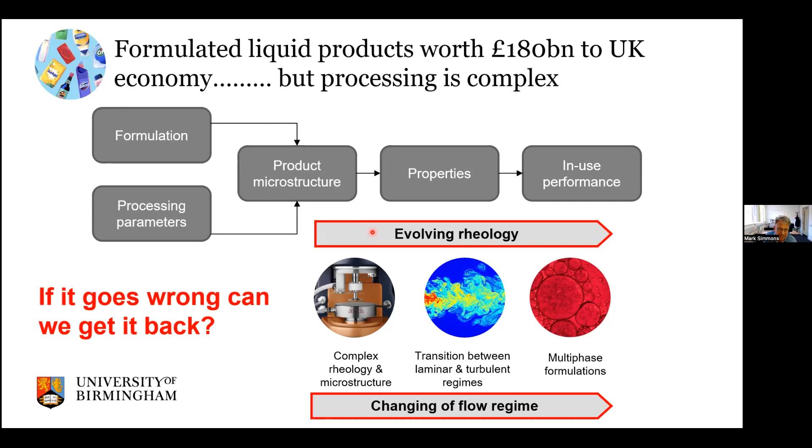So they're hard to process, and we need to find ways as engineers of being able to do that, particularly as we change formulation, changing to new ingredients, perhaps changing to greener ingredients that might inherently be more variable in their properties. How can we make sure that we maintain that product quality? And of course, very importantly, if it goes wrong, can we get it back? Because if we mix badly and we get the wrong microstructure and there's nothing we can do about it, we've got a big sustainability issue with lots of waste.

So I hope I'm not going to flit around too much today, but I thought it would be useful to give a bit of an impression of three current areas of work that we're doing in our labs in Birmingham, together with our partners, including Joelle actually, and David Fletcher at the University of Sydney. The first thing I'm going to talk about is mixing and transitional flows, because that's clearly a really important area. How do we actually go about simulating the flows when we're in this very difficult and poorly understood regime? So that's more of a sort of a processing end. Then the following two case studies are more about looking at the product and the product quality as a function of the processing conditions.

I'd like to start off by talking about microstructural development in the processing of an FMCG product, in this case hair conditioner. And then finally, probably the most complicated but least understood is the formulation and mixing of battery electrode slurries. So I'd like to start off by talking about mixing and transitional flows.

This is some work that we're doing in partnership with Unilever, and with Joelle and David Fletcher. It's really building on trying to understand how we can develop or use closure models in CFD that will give us a good, reliable answer when we're moving into the transitional regime, either because we're moving from turbulent down into the transitional regime, or possibly moving from laminar upwards.

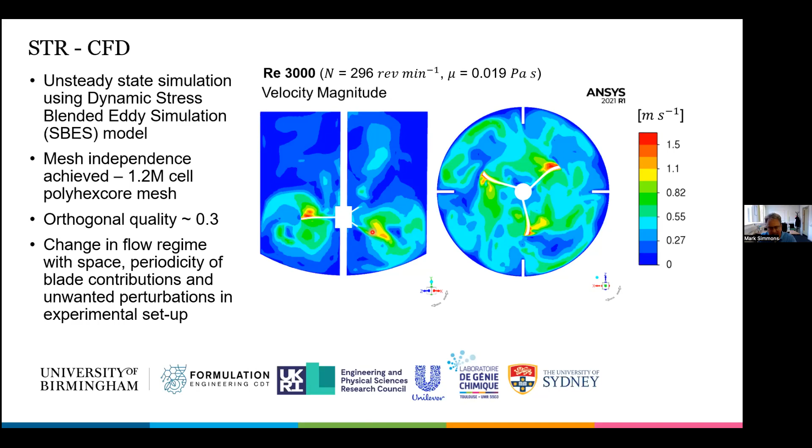So what we decided to do was to take a bit of a step back from that and actually do some experiments on pipe flows. What we thought we would do is have a pipe flow in the transitional regime and use a square-edged orifice plate to create a disturbance, and then see how those disturbances propagated as a function of Reynolds number, comparing the CFD with the PIV at each case.

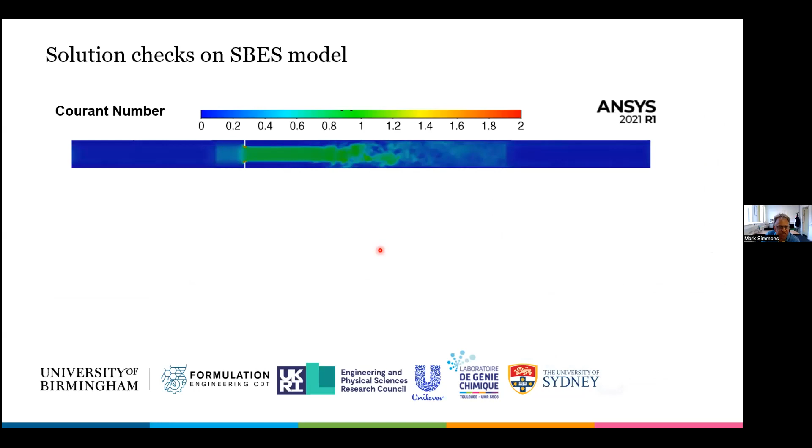So just to start with the CFD model, if you're using SBES, you do need to do some initial checks. The first one is to make sure that the Courant number, of course, is about 1 or less. We also need to make sure that the Y plus values are okay and within a range to ensure that the K-omega model is able to integrate down to the wall and that the LES doesn't switch in and produce some sort of wall function close to the wall.

So the first thing we actually did was to check the Reynolds number independence of the model. For our two experimental fluids that we used, we simulated two glycerol water solutions of different concentration. What we can see, if we look at the normalized velocity magnitude, is that we've got pretty good agreement in the flow, in this sort of recovery and flow development length downstream of the orifice, both at the same Reynolds number of 2030 for these two different fluids. Of course, as one might expect for the laminar flow model, we see a much longer flow development length.

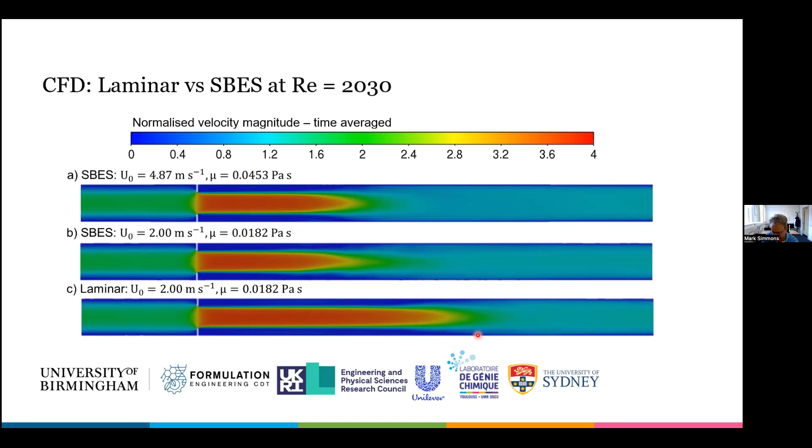We also had a look at the turbulent properties. For a laminar model, it's a moot point what that actually means. But for the SBES model, we're seeing a reasonably good scaling with the Reynolds number and a good, well-behaved solution.

The question then is what actually happens when we compare this with the particle image velocimetry results. These are the initial results from our PIV simulations. What we're seeing is the normalized time-averaged axial velocity down the centerline of the pipe as a normalized distance downstream from the orifice plate, and how that velocity changes as a function of the Reynolds number of the flow.

Quite encouragingly, in the turbulent regime we're seeing that the flow development length becomes independent of viscosity, as one would expect. But as we move towards the laminar regime, we're getting a longer flow development length, with some behavior in the transitional regime that does seem to behave well as a function of the Reynolds number.

That was really just a sanity check on our PIV data. What we then did was look at how the velocity profiles were changing downstream of the orifice plate for the two different solutions. The PIV data are the dots, and you can see the three different CFD models indicated by the lines. Generally, close to the orifice plate we're getting pretty good prediction. As we move further downstream, the SBES seems to give by far the best prediction, but we do see some discrepancies as we move from close to far away.

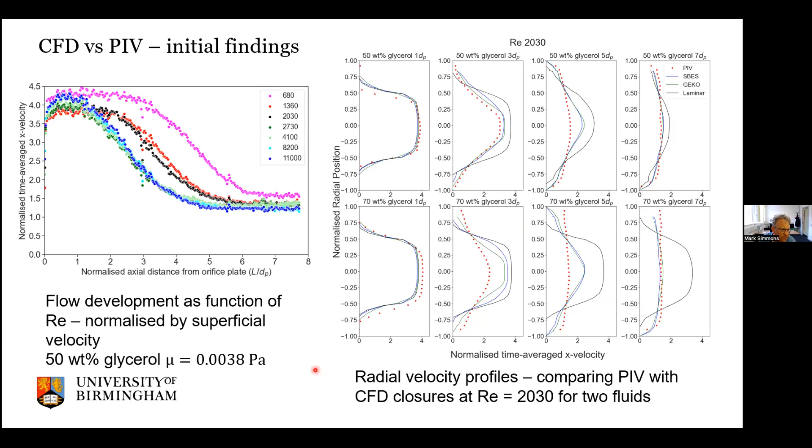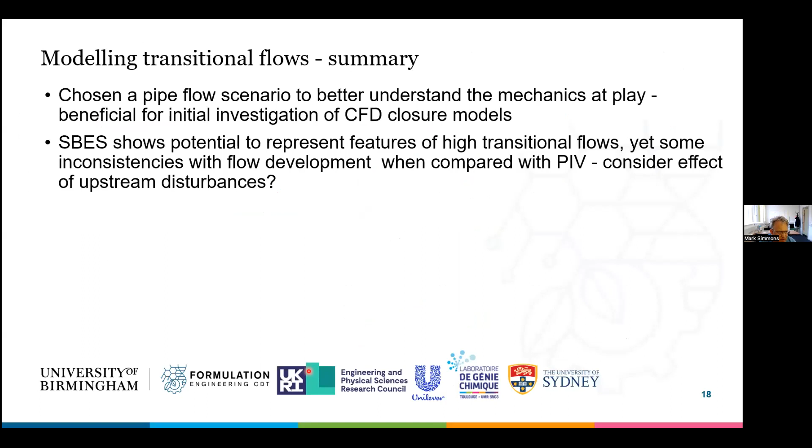So that's just some early interesting results around transitional flows. We've chosen a pipe flow to better understand the mechanics at play. The SBES shows the potential to represent features of high transitional flows, but we need to think more carefully about how the upstream disturbances might be affecting things. And we are getting a reasonably good scaling of the Navier-Stokes equations with the Reynolds number using the SBES models.

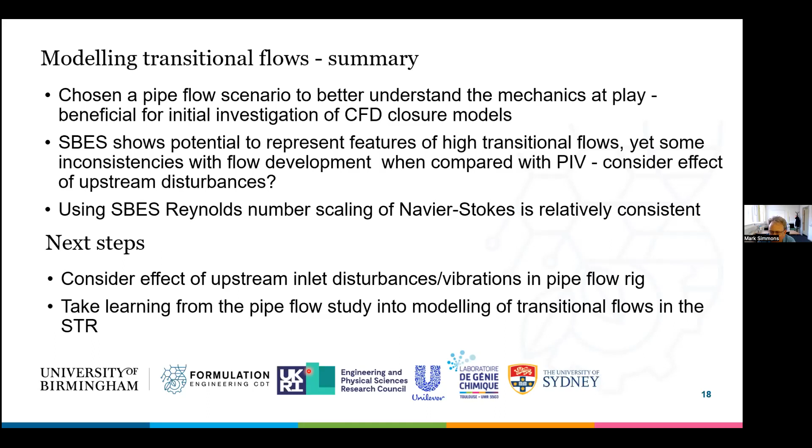So the next steps are to look at the upstream disturbances, and finally, once we've done all that, we want to take the learnings from the pipe flow study into the modeling of the transitional flows in the stirred tank reactor.

Okay, so that's the first one. The second is following the microstructural development in the processing of an FMCG product - this is the hair conditioner. The idea behind the hair conditioner product is that it's a lamellar gel network, a mixed crystal bilayer of fatty alcohol and surfactant. It's got layers, and then interlamellar water in between them, which gives it specific properties.

But formation of the right lamellar gel network is quite complicated, and getting it right is critical, because if you over-process this material, you can get it to the point where you can't bring it back, and then you've got waste. So this is something where you've got to process it well and get it spot on straight away. This is the structure, and this is the mixing operation that makes that structure.

You have a very complicated industrial mixer, with a sequential addition of raw materials. As you add these in, the fill level is changing. As you add the different ingredients, the rheology is changing massively, as is the mixing efficiency. And of course you've got to get the right product quality, and make sure you do all of this in the minimum time with the minimum power. So, no pressure here, it's quite complicated.

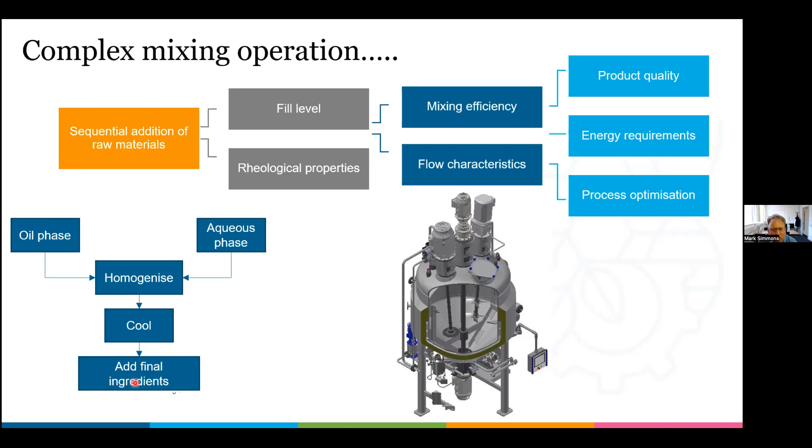So what we actually did was we decided to use a rheometer as the mixing vessel. This is a rheometer equipped with a vane geometry, and with a rheometer you get very highly accurate measurements of torque as a function of speed. We wanted to see how, as the viscosity developed, the power we're putting into the material was changing, and how the viscosity of the material was changing as a function of time, temperature, and agitator speed. The idea here is to understand the relationship between power, energy, and the viscosity of the material.

So this is what you actually see if you carry out this operation. You mix the water and fatty alcohol at 70 degrees C, which gives a relatively low apparent viscosity. Then you add the surfactant, it melts, and the structure starts to build. It builds to a peak, then goes to a steady state, then you cool, and you have your final product. The question was, how does the shape of this curve change as we go about processing the material, in this case in the vane rheometer?

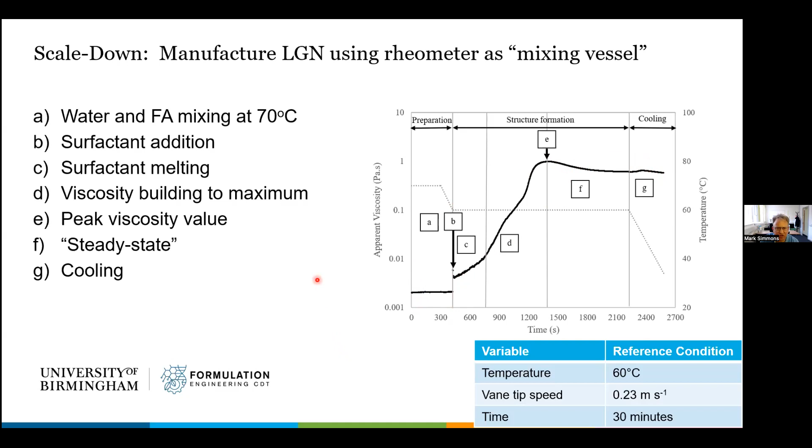The first thing we did was vary the agitator speed, which gives a different characteristic shear rate in the vane rheometer. As we increased the shear rate, the peak viscosity occurred sooner, but the power requirement increased quite considerably as a function of the increased shear rate. The yield stresses generally tend to increase a little bit as a function of the increasing speed. So the yield stress, if you like, is the quality measure we're considering in this case.

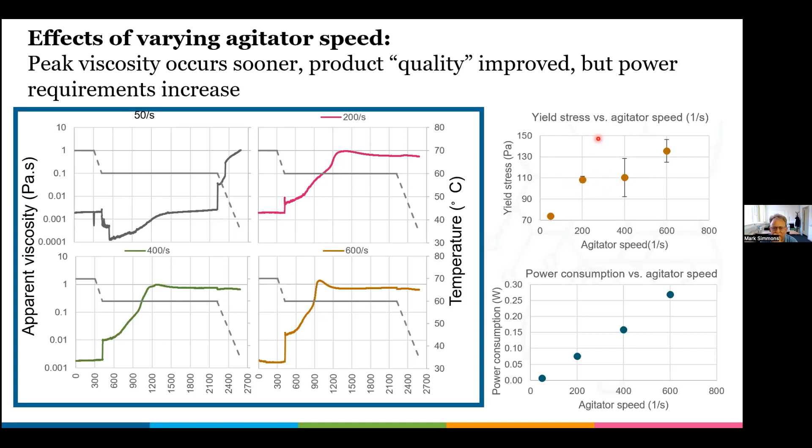If we change the time over which we do the mix, the steady state viscosity was achieved after about 15 minutes, but the processing time can be reduced and you still get the higher product quality. So again, you've got a trade-off between power and time, but you can also maintain the quality if you're changing the overall time of the mix.

I could produce quite a few different graphs showing these different parameters and how they change as a function of each one. But what's really interesting is when we started looking at the power per unit volume needed to achieve the peak viscosity - or perhaps I should say energy per unit volume, here in joules. What we found was that the energy per unit volume or per unit mass required to achieve the peak viscosity was always the same. So if you integrate under the graph to the peak, you always get the same value.

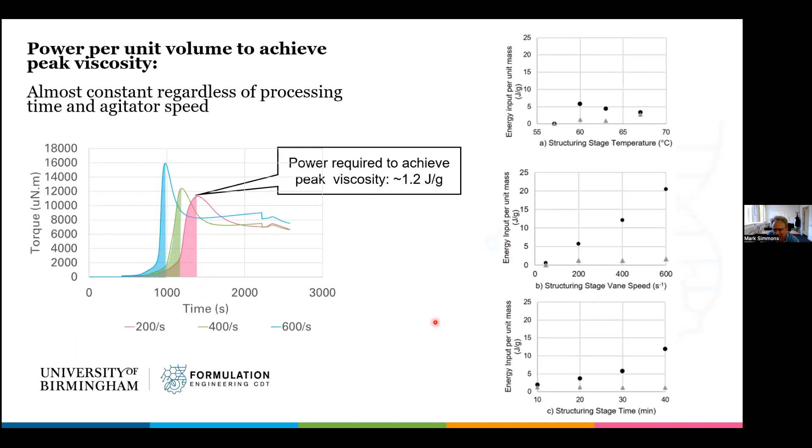This becomes useful because it starts to tell us something about how the processing is working. If we can optimize our stirring speeds to ensure we get the right energy into the material at the right time, we should be able to optimize, perhaps on a larger scale, the batching time and the batching shear rate we're actually targeting. So that's as far as we've got so far with that.

Clearly what we've done is something on a very small rheometer, and I won't pretend it's going to behave exactly the same as a larger scale mixer. So the next step is to start testing the principles we've developed, the relationships between energy and power, on larger scale mixers with industrially relevant geometries. And then we can move to looking at the characteristic microstructures that are being developed.

Okay, so the final thing I'd like to talk about today now is the formulation of lithium-ion battery electrode slurries. This is actually quite a poorly understood material in a mixing sense, and obviously it's a very important one given the needs for more and more lithium-ion batteries. We need to make more batteries and we need to make them better, as we know from the number of gigafactories being built around the world now.

So these slurries are quite complicated because they consist of an active material. In the case of the cathode, it's a mixed nickel, manganese, cobalt, lithium oxide. In the case of the anode, it's a graphite material, and they form the majority of the slurry. So it's a really high solids fraction.

Included in there, you've also got a binder, which are generally polymer binders, different ones depending on whether it's the cathode or the anode - so that's PVDF, carboxymethyl cellulose, and styrene butadiene rubber. And then you also add in a conductive additive, which is a nanoparticulate material, generally a carbon black of a different grade between the anode and the cathode.

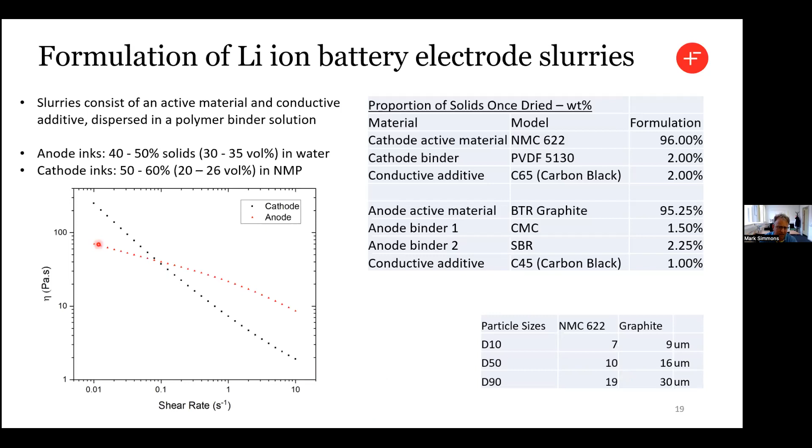But those are nanoparticulate, whereas the other particulate materials are more micron size. So you've got a pretty complicated matrix comprising the polymer, larger particles and smaller particles, and how they arrange themselves in the microstructure is really important to the performance of the battery. And perhaps unsurprisingly, they are shear thinning materials.

So what have we been doing? Well, we've been looking at how we might scale up the mixing, and that becomes problematic because what you actually need to do is make material at different scales for testing, but also for production.

And then as we move to the lab or pilot scale, you've got these Eirich type mixers, which can go up to actually 50 liters or even 500 liters in size. That's equipped with a rotating pot, a scraper, and some sort of turbine in the middle.

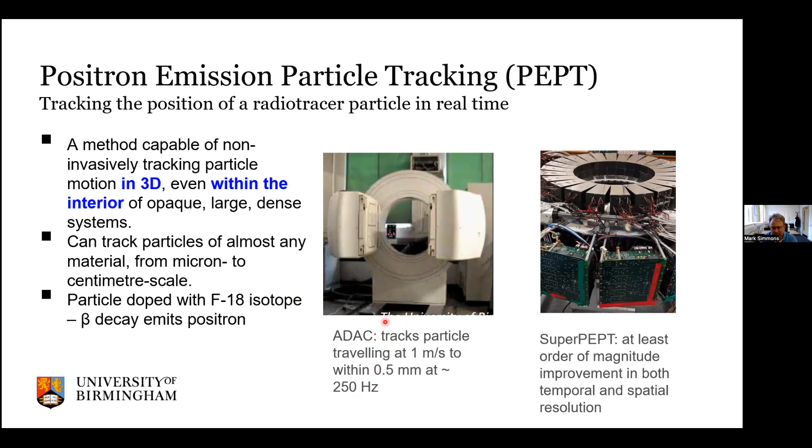But what we were really interested in doing is trying to track how these materials are actually mixing within the vessel. So this is the Thinky mixer, which is the work done by Sam as part of the Nextrode project.

The Eirich mixer is a little less complicated because the bowl is stationary, even if it's rotating, it's not orbiting. But we can see how the mixing pattern changes as a consequence of the changing bowl speed. This is initially just done with the binder in water, and you can see that as we increase the bowl speed, the fluid starts to wash up the side of the bowl. As we add the graphite in, we see the viscosity change and a dramatic difference in the behavior of the tracer, not only in terms of its speed, but it looks like the energy is being transferred a little better to the fluid once it becomes more viscous. It's probably because the fluid is starting to move down more towards the bottom of the vessel again as we add in the graphite. The next question will be to see how we can calculate mixing indices from this data as a function of the recipe and as a function of the addition.

Other work we've done uses electrical resistance tomography and other methods to look at overall macro to mesoscale mixing. We've been able to track quite nicely the behavior of the graphite as it's added into the mixer. You can see the big lump on the side that hasn't mixed in - that's been picked up really quite nicely by the ERT. More precisely, we can split the tomograph into a series of zones, and we can see that when the graphite was added into zone 8, it became incorporated, or the lump moved into a subsequent zone, zone 7, and then was brought back to a more homogeneous condition over time. So we can get a rough idea of an overall macro scale mixing time as we're adding each of the components into the slurry.

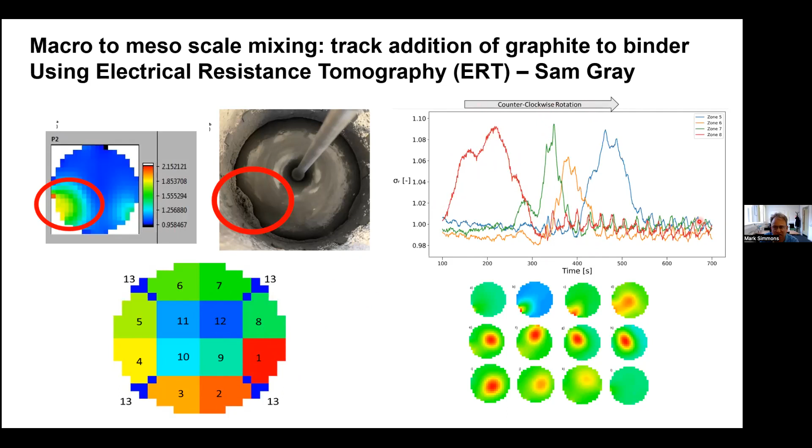We can also be a little more subtle by taking offline electrical impedance spectroscopy measurements. What we're able to do is detect, from a frequency spectrum, the distribution of the carbon black as a function of the mixing time. As we distribute the carbon black better, we should end up with a more conductive matrix, and that's something we can pick up from the spectroscopy. There's what we call the knee frequency, which changes as a function of the mixing time - generally, a lower knee frequency effectively means a more conductive matrix. This is a nice, subtle way we've only recently discovered, perhaps picking up properties of the mixing from a more sophisticated method generally used by battery people.

Okay, final slide, because I realize I'm running out of time here. We have also been using rheology as a mechanism to try and understand our microstructure. Here we have two identical slurries mixed on two different mixers, the Thinky and the Eirich. You can see that the Eirich has produced a slurry, from its standard operating procedure, that's about an order of magnitude higher in viscosity than the thinky. The question is why that might be. We know that if we mix it badly, we get a kind of mechanical gel forming, which has quite a high apparent viscosity. But we also know that if we start breaking down the agglomerates of carbon black in the mixture, we also start to raise the viscosity. So increased viscosity doesn't necessarily mean the slurry is good or bad, unless we use it in conjunction with something else - and the other thing we use here is some oscillatory rheology.

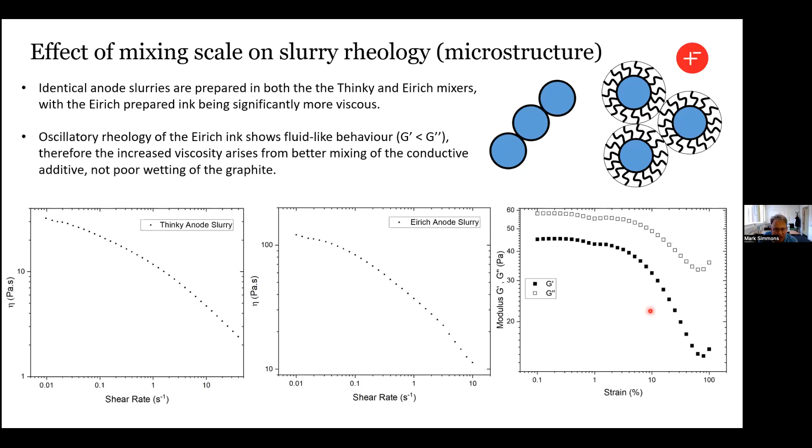So, last slide from me on the technical side. Scale up and down of battery materials is obviously complicated by microstructure requirements and different mixer designs. I think the key to all of this is you need to use a lot of different methods in tandem to really understand what's going on. You can't just rely on one method to understand how your microstructure is changing. If you're just measuring rheology and you think the viscosity is the measure, well, clearly in this case it's not. You need something else as well, because lots of different microstructures might be giving you the same viscosity. You need to be more subtle.

I think our future work is going to be to assess a wider range of formulations, mixer types, and scales. Ultimately, where we want to get to is to develop practical guidelines for practitioners in scale up, including mixing indices. So I'll just finish now by saying thanks to all the collaborators, the people without whom this wouldn't have happened, and of course all our sponsors as well.

Thank you for listening, and any questions?

So I will. Thanks very much, Mark. Thanks, Mark. I have a couple of questions online. Okay. So I have a question, I'm assuming it's Ravindra Aklave, because it was posted at the same time in the chat and in the Q&A tab.

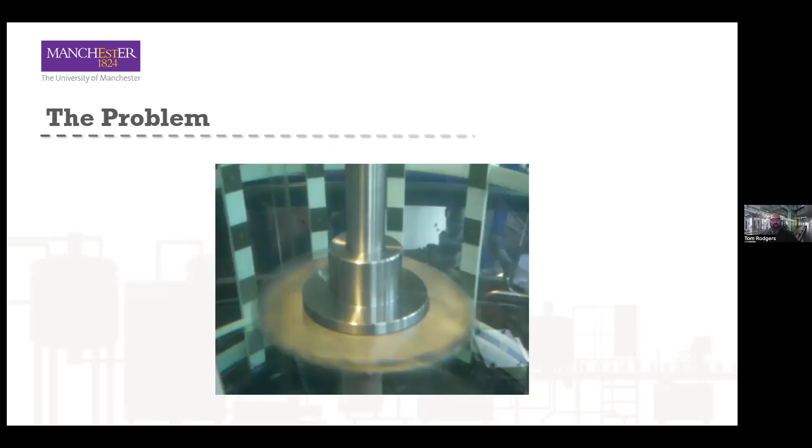So this starts by looking at adding something of much different viscosity to one viscosity. In this case, we've got water, and what we're actually doing is adding a surfactant to this - a very high viscosity material - and it dissolves or mixes within the water. So in this case, it's a standard operating procedure: you just get a bucket of it and drop it in. You can see it falling in there, and you've got all kinds of horrible things happening. In this case, there's some stuck on the back of our tank. You can see large pieces moving around, breaking on the agitator. How do we actually monitor that process?

Okay, so through this talk, I'm essentially going to be thinking about how we're going to do that with one technique. So if we've got, say, a person, or in this case, a rabbit, and we want to look inside of that, I don't think anyone would be surprised if we say, oh, well, we can sort of x-ray it and we'll get a nice view inside.

But of course, we can't really do that if we're in the lab, or we're actually in our plant, as we've got x-rays flying around, or we've got metal lined vessels, etc. So we can move to a technique that gives us a similar idea of being able to look inside our process. I'm going to focus on electrical resistance tomography today, which essentially is where we're applying a particular current across electrodes on our vessel, and then measuring the voltage response at different positions on our vessel, and that allows us to get some kind of map of the electric field within our vessel.

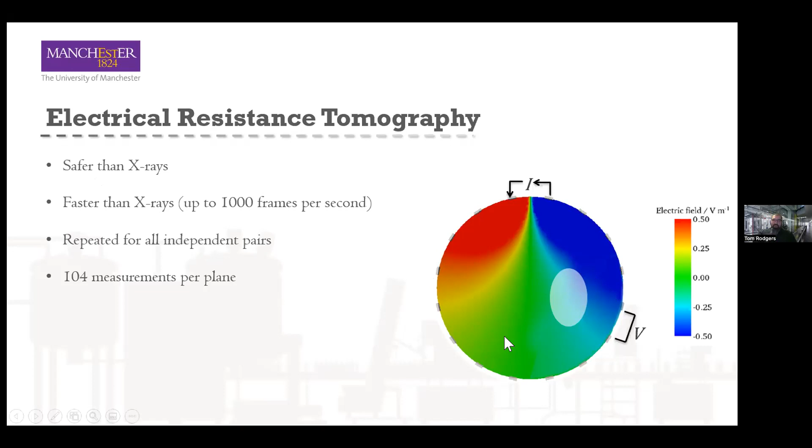The advantages for us is that it's a lot safer than, say, x-rays. It's a lot faster too. It's possible to get 1,000 frames a second, so we can image very fast flows, or if you've got a slower process, you can take multiple images and average them to get better data. And we can have lots of different layers in our system to measure it.

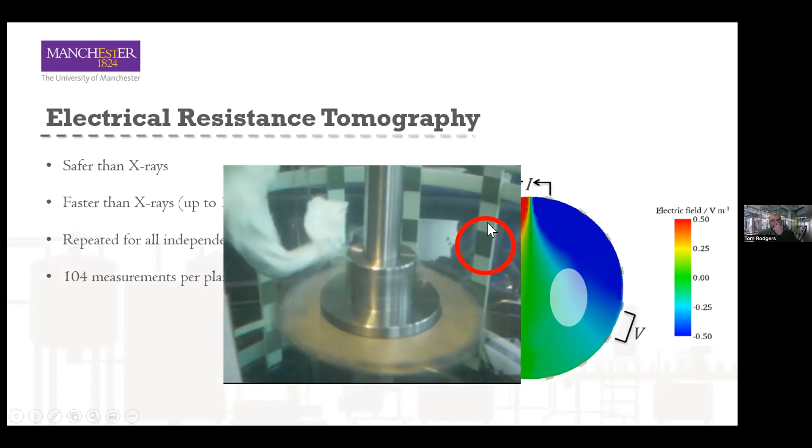So if we go back to our mixing system here, you can actually see that the vessel we used has these rows of electrodes along the outside of the tank that we're actually using to do our mixing.

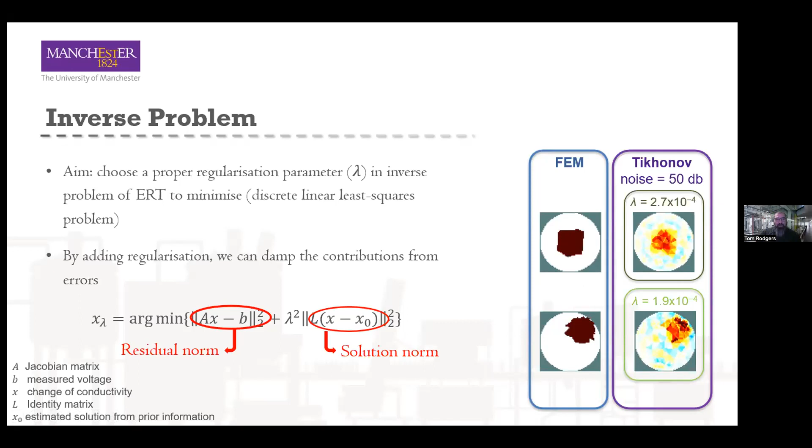And in this case, we've added a large amount of noise to replicate the tank all moving around and an agitator spinning, as I'm sure many people are familiar with when you turn these things on.

So coming back to the video we looked at, what type of information do we get out of the system? In this case, because we've got such a large piece of material falling in initially, we can actually resolve that large lump coming into our system. We've got our lump falling into our low conductivity continuous water phase, and our high conductivity surfactant being added as a lump, we've got interaction with the agitator, and we've got splitting of the lump into two pieces.

After a certain time, as you could see in the video, the lump was broken up and formed these little thin strands. We can't detect each individual strand using the tomography technique, but what we can do is see them dissolving, because we can see their conductivity. So they slowly dissolve until we get a dissolved, homogeneous system at the end with our surfactant dissolved in our water.

Interestingly, I've put this red line in here, and this is the point where you can visibly no longer see any of the strands. So when this process was originally designed and people were watching it to the point where it looked mixed because there was no surfactant strands left, they weren't actually getting to the end of the operation condition. It was actually still dissolving with strands, but they were just too small to be visually seen.

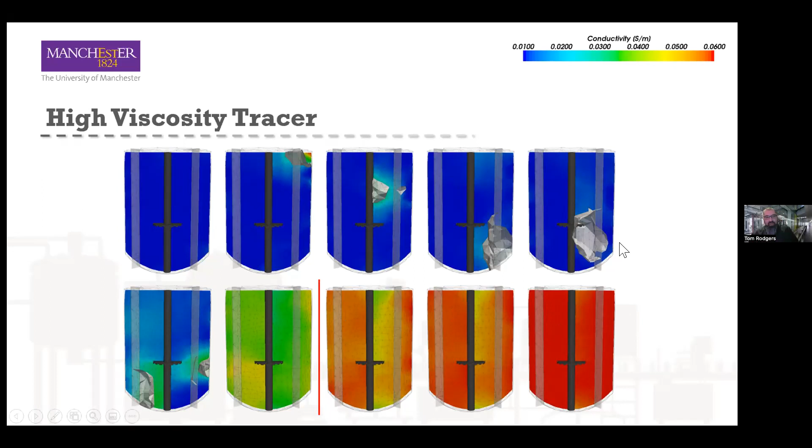Okay, so this system was quite interesting. I think it shows some of the challenges, especially around where we can actually measure a mixing time for these systems. But really interestingly, and I think one of the great challenges, is that we get two trends depending on how we actually add the material to the tank.

So let's move on and think about some mixing with Newtonian fluid. We're changing the viscosity of our fluid, but actually whatever shear rate we're under, that fluid has the same viscosity. So this is quite a small sort of lab scale system.

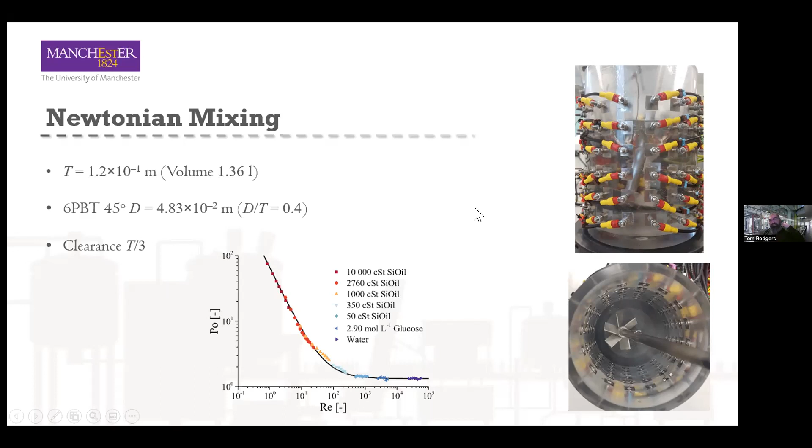But with our ERT, we can essentially look at analysing this. So we're using different concentrations of glucose, changing from a water-like viscosity up to about 1,500 times the viscosity of water, and adding a small trace of material with the same viscosity as what's actually in our vessel.

We're taking advantage of the fact that with the ERT method, because we get this distribution across the whole vessel, we can divide our vessel up into zones, or get an overall measure. In this case, we're dividing it up into zones to see how the mixing actually takes place within our vessel.

Within each zone, we're applying a local measure of our T95 mixing - when a particular zone is classed as mixed, with essentially no more changes within that zone. You can see that when we've got a more high viscosity liquid, at a Reynolds number of 22, we've got a large distribution of when the mixing can be considered finished within our vessel.

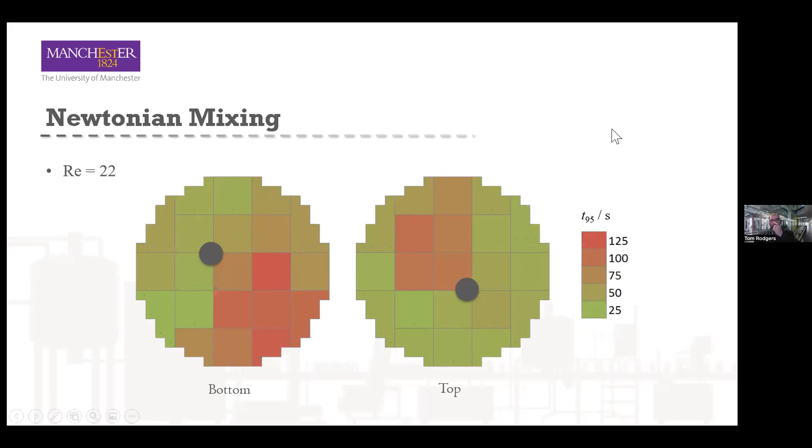And if we do that for these different systems, we get this sort of fairly standard mixing time versus Reynolds number and power number plot. We're getting the trends we expect, but we are measuring that end mixing time. Nothing too surprising for viscous systems, but it's showing us that we've got this real inhomogeneity of mixing times within our vessel.

So let's move on to a system that's probably slightly more useful in the more viscous areas. This is exactly the same experiment, which I'll go through, but with an anchor mixer in there. We produce exactly the same type of trends, but of course different values compared to our pitch blade turbine.

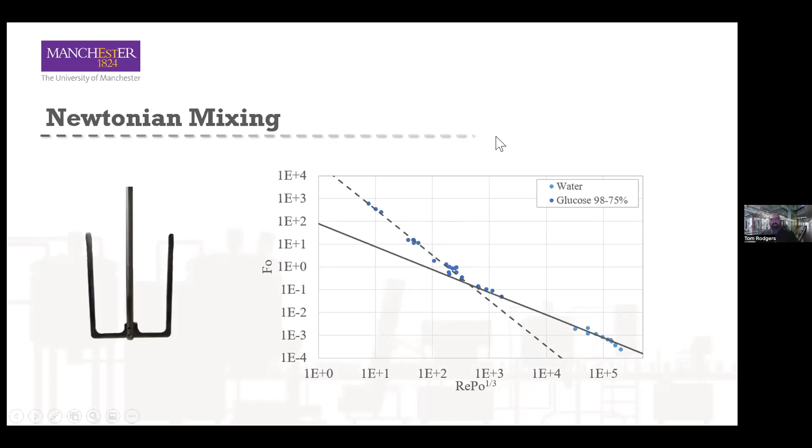Now let's think about adding a different component - in this case, some shear thinning material, some different concentrations of xanthan gum. What are we actually using to replicate the viscosity? There's no evolving rheology necessarily by adding anything, but it's a shear thinning material, so the anchor moving through all the different shear rates within the vessel does that.

We get relatively good approximations by just taking an average approximate shear rate from the anchor spinning, using a Metzner-Otto style relation, and that allows us to map the mixing time quite well onto our same lines here as our Newtonian one. So this dotted line and this straight line are unchanged from the Newtonian data. Okay, so that's nice.

That tells us we've got some confidence that we can do an approximate shear rate and a modified Reynolds number based on that viscosity to still approximate our mixing time.

So what if we take another step of interest and look at something like shampoo? If we've got a shampoo, adding salt to it actually changes the rheology of the material. Say we were adding a salt tracer to our shampoo, or adding salt within the manufacturing of shampoo, which is a typical step, we get a material whose rheology changes based on that concentration of salt. So as the salt concentration moves around the vessel, we can have evolving rheology in the vessel.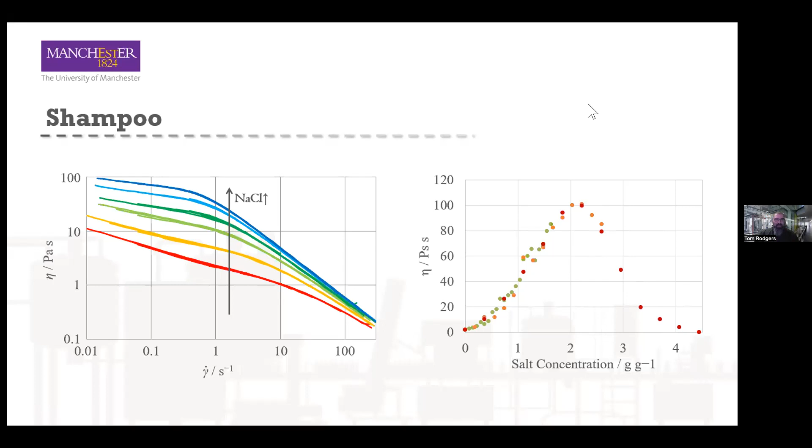The horrible thing for us in terms of mixing is that when we start to fall over the plateau, although the average measured viscosity decreases, the material becomes increasingly more viscoelastic. So we get much more time-dependent issues occurring, rather than just a viscosity we can think of as a steady state system.

So we can look at adding different salt concentrations, different amounts. If we repeated this activity with a Newtonian material, as we added more and more concentrations of salt, or in number of addition steps, we would expect that mixing time to basically stay the same, because adding the salt isn't necessarily affecting the rheology.

But in this case, not only does the mixing time change with our continuous number of additions, it changes differently depending on the amount we're adding, which, when we think about the rheology, isn't that surprising. So how can we put this together to give some indication of how long it takes to mix?

It seems to turn out that, at least with the shampoo system, if we look at the viscosity of the end point condition at the end of that individual addition, that's the one that seems to help bring mixing time information back to what we'd expect as our base case condition, which we can think of as the Newtonian case.

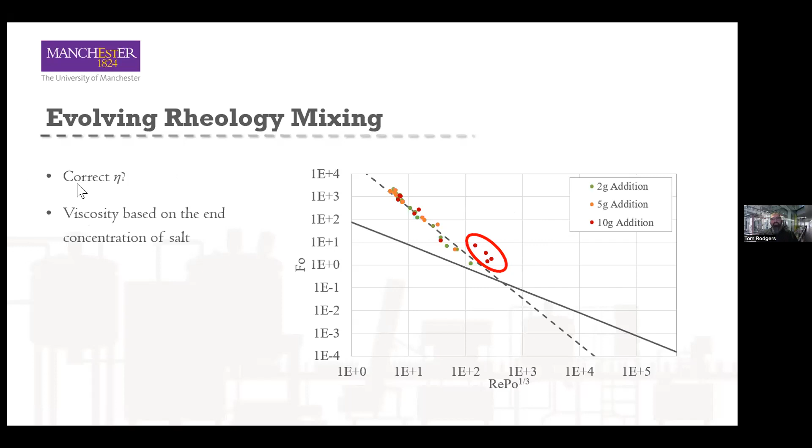I should point out these four points here, which don't fit that closely to our line. These are actually the highest concentrations of salt at the end point, ones that have fallen over the top of our curve. So we're seeing additional viscoelastic properties, and the viscosity as we add that salt is actually reducing in our system. This is probably a different metric that we're not taking into account by just looking at that end viscosity and an average shear rate within our tank representing that viscosity.

As mentioned, Mark originally gave a very good introduction to hair conditioner. So not only is it shear thinning under different shear rates, but the shear actually changes, or can change, the rheology of our final product, and consequently the conductivity.

If we've got our tank here with a batch of our made shampoo, it's then quite common to do what's called a post-shearing process, which is to send this material through a high shear mixer, in this case a Silverson mixer, and then bring that back into our vessel to post-shear, which changes the viscosity of the system.

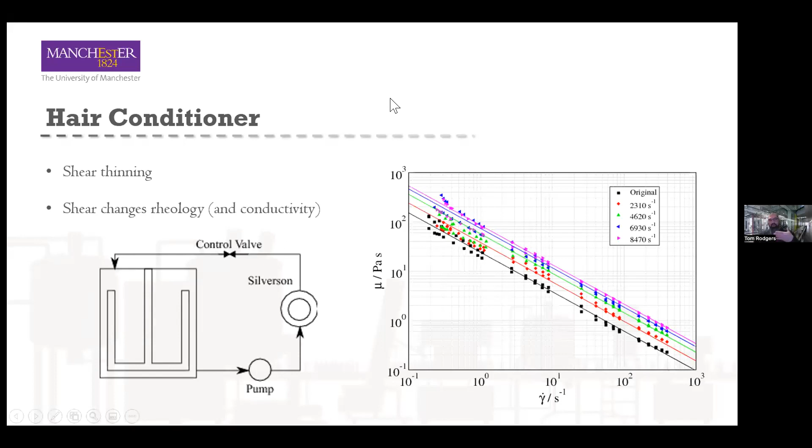Essentially what that shear is doing is adding energy to our system, which rearranges that very complex microstructure that Mark introduced to us, and that's reflected as a different viscosity within our system. We can monitor that process with our tomography technique. This first image here is our hair conditioner that has not been post-sheared, and it's still very viscous, but a bit dull, I suppose.

If we want to go into personal care terminology, it's sort of dull and lifeless, and doesn't look very appealing to the consumer. After our post-shearing process, you can see not only is it more viscous here, but it looks more like the hair conditioner we're familiar to seeing in our bottles.

But what we're actually seeing here is we're tracking that change in conductivity, which is a mirror of that change in viscosity, as it's going through our post-shearing process. We're taking it out at the bottom corner and putting it in at the top corner. So you can see not only is it taking a long time to mix through our vessel because of the high viscosity, but we've got a change in rheology just due to that post shear.

And the interesting thing is, it's just the shear. We're not adding any other material, so it's not like we're adding something more conducting to this.

These are great because we can actually use this to track when our process is finished. Depending on different shear rates and different flow rates through, we get different levels of this conductivity and different viscosities measured from that. So we can track a whole variety of how that material is changing.

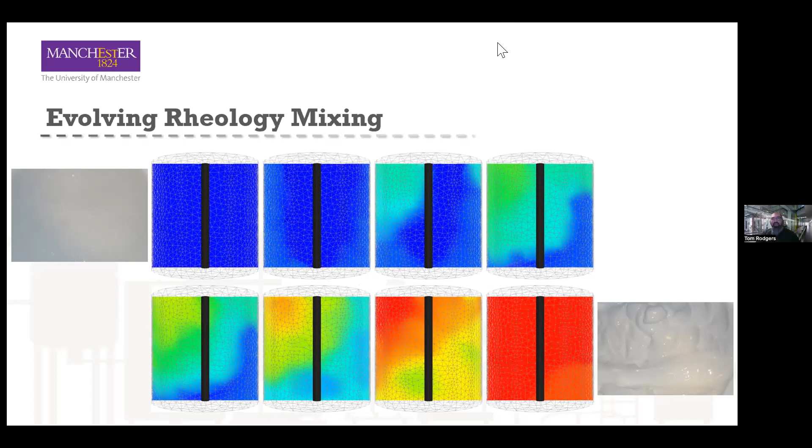In terms of this graph, we're passing it through a more controlled number of times. This is actually done with one tank. We pass it through, collect it, and then transfer to a second tank manually. So we have a control, and in this case we were doing up to 5 to 6 times.

As Mark commented, if you do it too many times, or your speed or shear rate is too high, you can actually destroy the conditioner. We did have a number of runs at very high rates where, instead of a lovely hair conditioner, we got kind of blobs with water coming out, as we'd actually broken the microstructure.

So do we have time for one last question? Is it still okay? I have an interesting question: in the production plant, would this system need constant calibration for varying material species?

It would depend on exactly what you wanted out of the system. In the case of generating a mixing time, so long as you've got a start point and an end point, that's all you would need. If you're looking for something to go to a steady point at the end, that's all you need. You don't necessarily need an exact value, or there's less worry if the value drifts. So it doesn't need constant calibration.

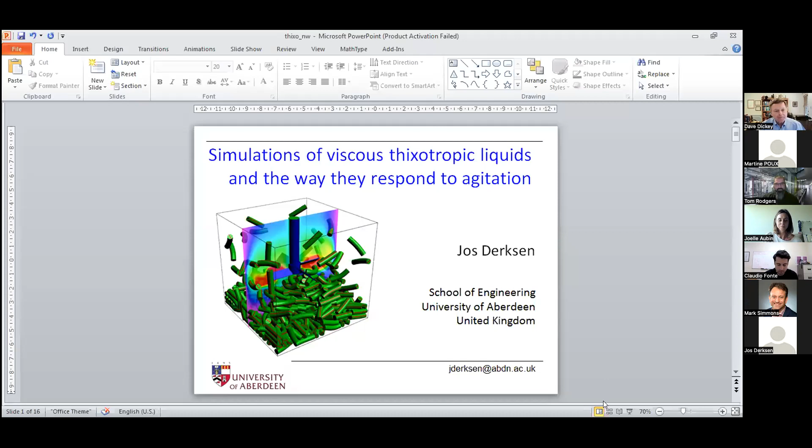Jos, you're muted. Need to turn your microphone on. And if you can put your video on, that would be good also. Now I'm unmuted, hopefully. Yeah, we can hear you now. And now you would like to see me, which is not a good idea, but I'll try anyway—it's always nicer to have it. Well that's great, okay, off you go, thanks a lot, cool. So now, thank you, how do I get rid of the bottom bar? Anyway, yeah, ready to go.

Thanks for joining this webinar. My name is Jos Derksen. I'm in Aberdeen in the United Kingdom, which is in the northeast of Scotland. I'm going to talk about simulations and not about experiments. I deeply respect experimentalists and experimental results, but well, there's only 24 hours in a day, and I would like to focus on simulations.

I'm also not going to talk about hair conditioner. I'm going to talk about different applications that relate to industries that have sponsored this research. So this is oil sands mining, and this is clay suspensions, and also the paper industry, which I'm showing here—wood pulp for paper, fibrous materials.

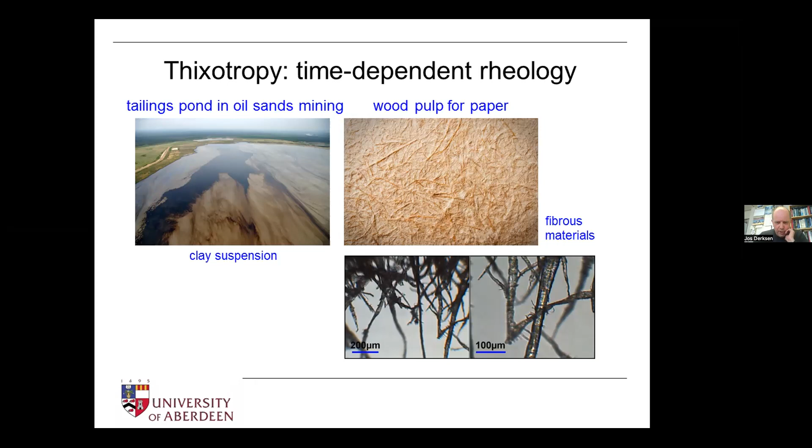So we have an unstructured material here that, if we keep it at rest, in time it evolves into a structured material. If we shear that structured material, it breaks down again into an unstructured material. The metric for structure and unstructure we call lambda, Greek letter lambda.

Lambda is 1 for a fully structured material, lambda is 0 for a fully unstructured material. In the thixotropic model, we connect lambda to the apparent viscosity. So if lambda is 0, we have an infinite shear viscosity, mu infinite. And if lambda is equal to 1, we have a higher viscosity, mu infinite, multiplied by 1 plus alpha.

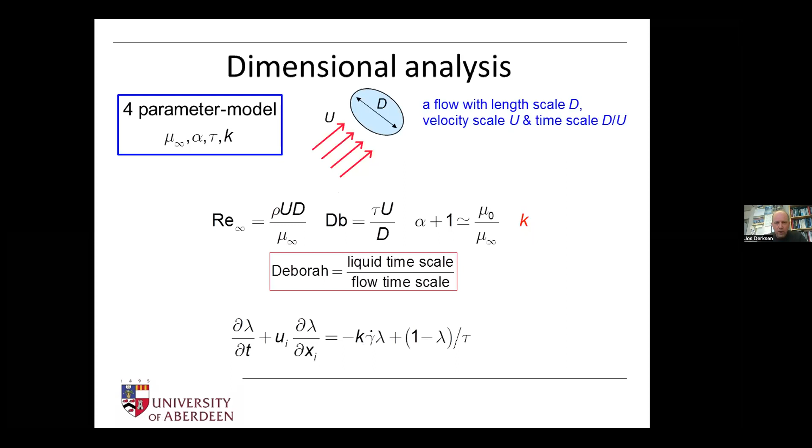I'm going to talk a little bit more about that K, because that's a bit harder to interpret physically. If we think a bit more about our thixotropic model, and we take the limit when the Deborah number goes to 0, then this thixotropic model evolves into a shear thinning liquid.

So this equation for the apparent viscosity is shown in this diagram here. Viscosity divided by infinite shear viscosity as a function of shear rate is a decreasing function with increasing shear rate, hence shear thinning. Now we can define a characteristic shear rate, gamma dot C, which is the typical shear rate where the viscosity has dropped to 50% of its zero shear viscosity. That K of our thixotropy model relates to that gamma dot C.

We are able to have a new dimensionless number that we call capital S, which is the characteristic shear rate multiplied by the flow time scale. So here is our model, here are the dimensionless numbers. Now we need to put that into some numerical scheme, some numerical method.

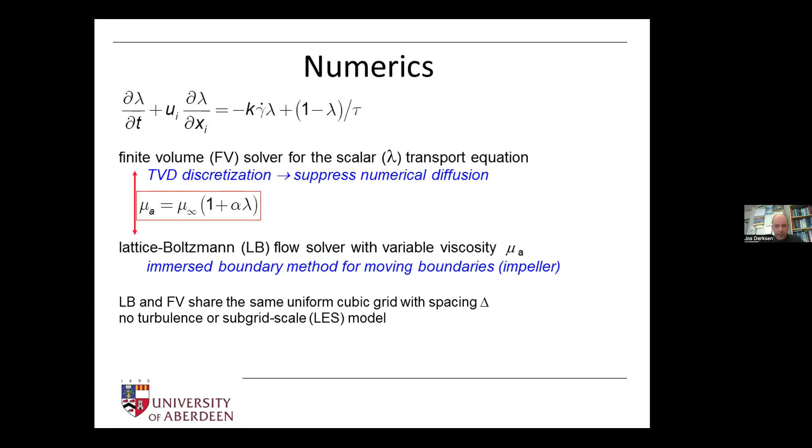All right, very quickly, I'm not going to talk about experimental validation, but I'm going to talk about verification. What we do to verify this system is we look at a very simple flow, the flow between two flat parallel plates driven by a pressure gradient or a body force. We look at the time-dependent transition from a Newtonian flow to a thixotropic flow to the shear thinning flow that I was talking about before.

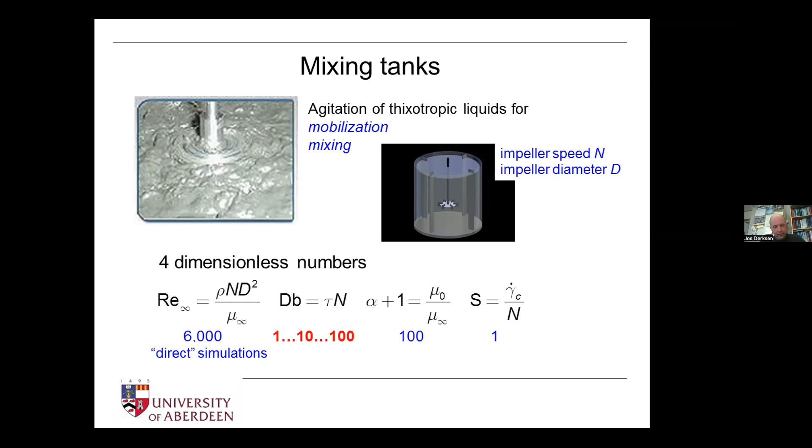All right, so we're dealing here with a Rushton turbine, and I'm quite sure many people in the audience will now think, well, why would you use a Rushton turbine for a viscous liquid? That would be an excellent question to ask. We're looking at a Rushton turbine baffled tank, and we're looking at a vertical plane in between the baffles.

So what we see here on the left-hand side is a Deborah number of 1. We're going to see 40 impeller revolutions, and the colors are the structure parameter. Again, we start with this fully structured liquid, lambda is 1 everywhere. Then we switch on the impeller, and at a Deborah number of 1, you see something like this happening. You see the colors turn from red into orange and yellow and purple in the impeller swept region and the impeller outstream. We see that the impeller has some, but limited, success in mobilizing the thixotropic liquid at a Deborah number of 1.

Now we're going to compare this with a Deborah number of 100, and this is a very slow liquid. We need to do many more impeller revolutions to see some appreciable mobilization. Again, we switch on the impeller in a fully structured liquid, lambda equal to 1, and we look at the very slow development of the flow system. We are not able at these time scales to fully unstructure the liquid. On the left-hand side here, we see a significant purple region. We are not able to really break down the structure at a Deborah number of 100.

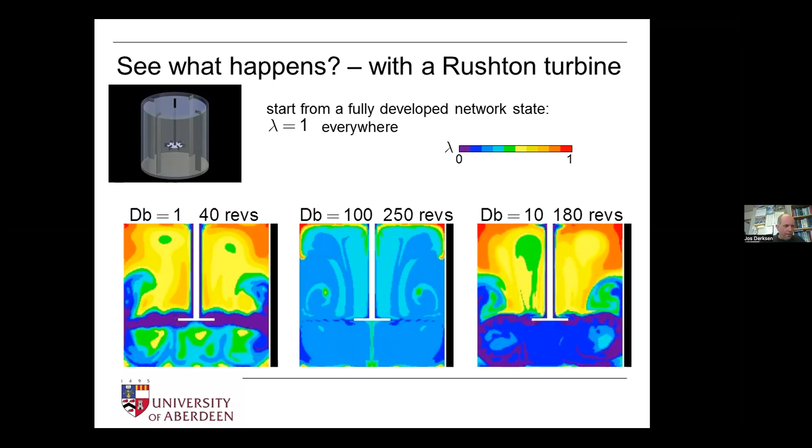Just quickly, let's see if we put in a different impeller. So we now put in a pitch blade impeller, baffled tank, vertical cross-section through the tank, starting again with lambda is 1, Reynolds 6000, S1, alpha plus 1 is 100, and we get something like this.

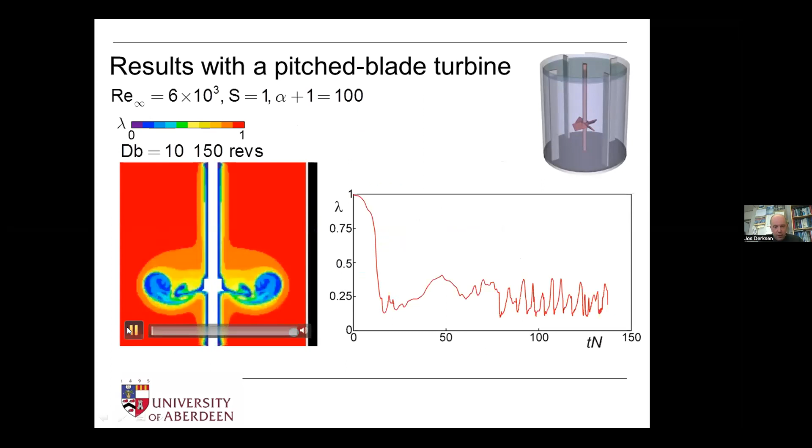And again, Deborah number 10 gives some interesting instabilities. While you're looking at this, you might also want to look at the right-hand side, which is a time series of lambda in the lower right corner of the animation. And then you see this quasi-periodic onset of an instability there.

Maybe I was talking too much, so maybe I should let it just run and you interpret for yourself. So here the instability sets on. In the lower right corner, you see the quasi-periodic fluctuations in the structure parameter lambda.

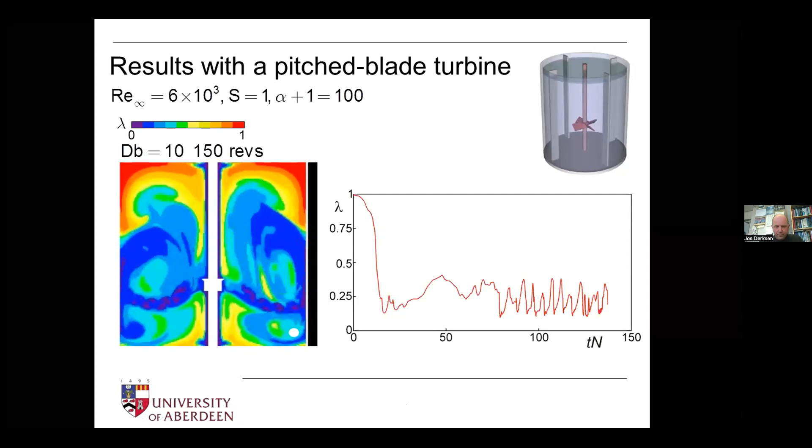All right, so what I showed before is the structure parameter. Now let's look at mixing itself. So now we have added a passive scalar to the system. We have this active scalar lambda, but we also have a passive scalar.

And what we're doing here is comparing a Newtonian fluid, mixing of a Newtonian fluid at Reynolds number 6000 in a pitch blade mixing tank, vertical cross section, where within 60 impeller revolutions we are at the end of this animation. We have mixed the system quite well. Obviously, the top of the tank is the last to become mixed. But if everything is green and yellow, we are in a mixed situation.

The system for a thixotropic fluid is different. It's not really a fair comparison because I compare Reynolds 6000 for the Newtonian fluid with Reynolds based on the infinite shear viscosity of 6000 for the thixotropic fluid. So most of the viscosity in the animation you see here is actually higher than that infinite value. But you see there is an issue with getting the upper parts mixed and getting the region close to the shaft mixed.

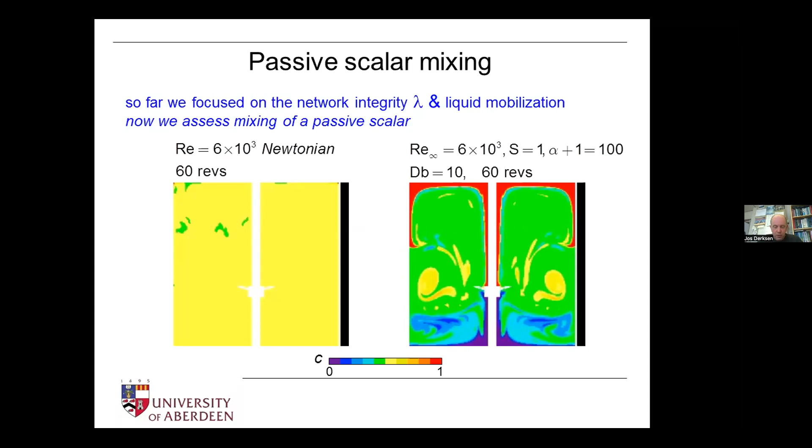All right, if time permits, I'd like to shift gears a little bit, because I'm pretty excited about this recent development. We talked about fiber suspensions, and in my opinion it's a very interesting opportunity to understand this structure formation in liquids by doing particle resolved direct simulations of rigid fibers and flexible fibers.

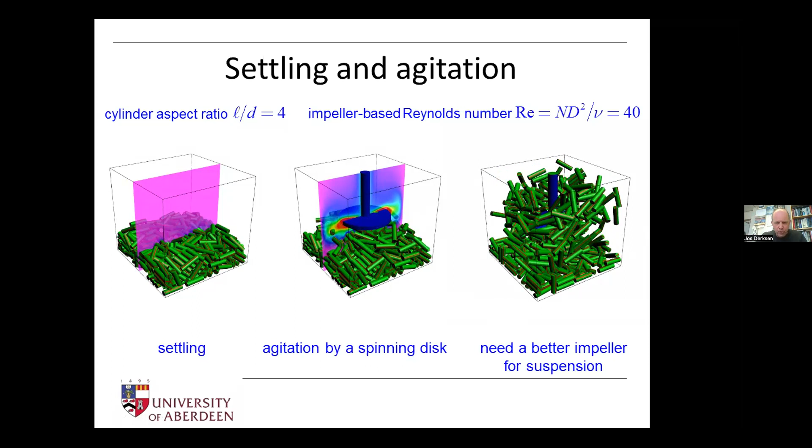These are examples. The ultimate goal of this sort of simulations, this sort of research, is to come up with a constitutive model about structure formation in fiber suspensions, and then connect that structure formation to apparent viscosity, or rheological behavior.

What I showed before were rigid fibers. We also do this for flexible fibers. This is like al dente spaghetti, short al dente spaghetti, in a mixing tank.

All right, so this is coming to a summary, or conclusions maybe. I showed you how to incorporate a simple thixotropy model, a time-dependent rheological model, into a flow solver. Problems in general with rheology are that there is a multi-dimensional parameter space. When we focus on the Deborah number, the main thing I think I showed was that thixotropic liquids move in mysterious ways, where we see this unexpected quasi-periodic behavior. I think an interesting avenue for better understanding thixotropy, specifically fiber suspensions, is to perform direct simulations of such systems.

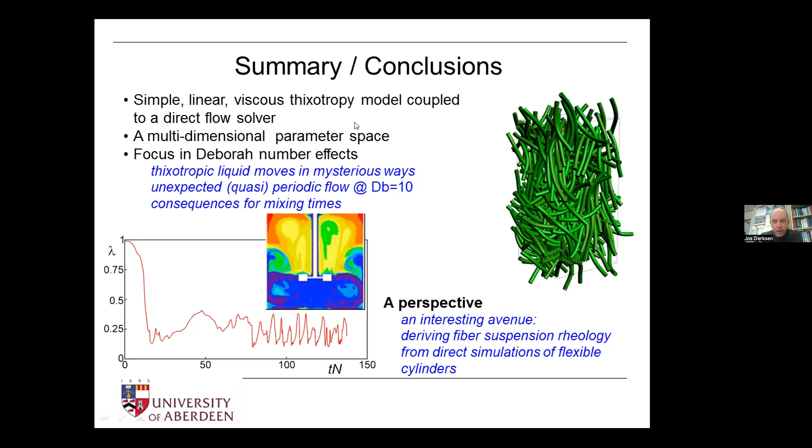That's what I would want to share with you. I'm going to stop sharing the screen, and I'll be happy to connect with you in terms of questions.

Thank you very much, very interesting presentation. So while people are writing their questions online, I have a couple, if that's okay.

I was just wondering about your thixotropy model, and I can only imagine what type of numerical issues you may get trying to resolve that equation. Do you need any special numerical scheme to keep lambda bounded between 0 and 1? Can it happen that it just starts jumping to values that make no physical sense?

Yeah, yeah, so you definitely need to keep it bounded between 0 and 1, which there are - well, let's say in K epsilon models you need a similar bounding strategy, so that's what we apply here as well. The most critical issue, as I already mentioned, is numerical diffusion, because that transport equation in lambda does not have a physical diffusion. So TVD schemes, total variation diminishing schemes, are a sort of efficient way, not a perfect way, to limit numerical diffusion.

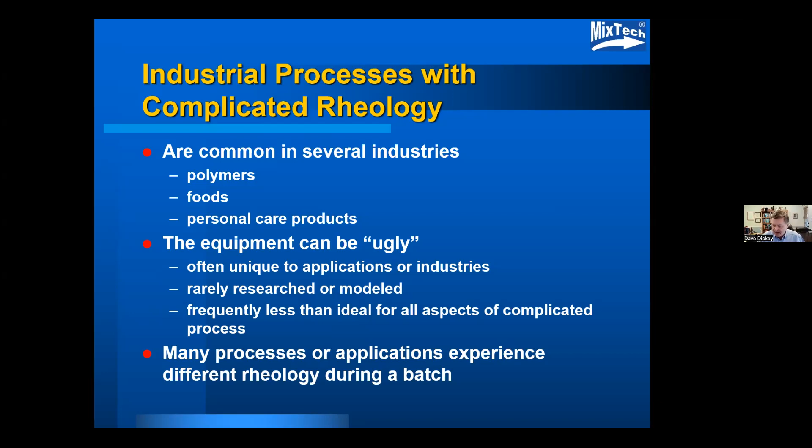We've already had a little of that from the standpoint that many of these processes have a developing rheology during a batch, so there isn't any one process involved. The other part is most of these processes don't involve chemical reactions. They're typically just formulations, multiple ingredients, different physical processes and properties, and some kind of changing rheology or other physical properties that occur during the process.

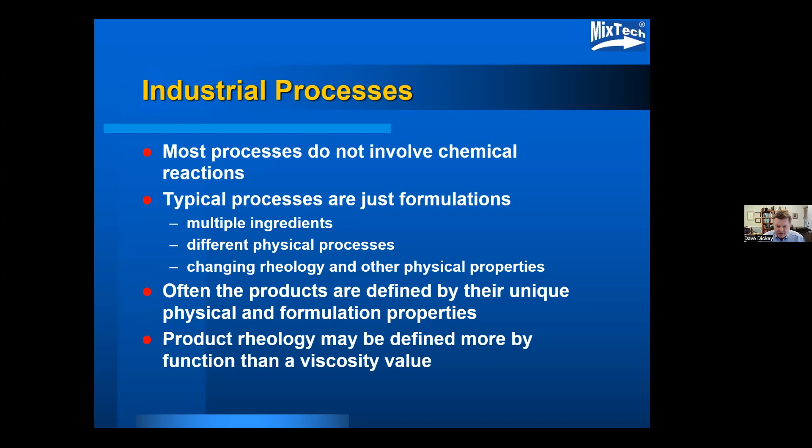Some of the places where we get into things defined by rheology quite often involve the use of polymers or thickeners. I'm going to give an example of a very high viscosity application involving some heavy duty equipment.

We'll talk about the creation of some multi-phase products, things like consumer products type things, where you get into liquid dispersion, solid liquid dispersions, and in some cases emulsion formation. These are not in general uniform liquids or uniform fluids. The function is often defined by some aspect of non-Newtonian rheology, and even that can be fairly complicated to model or describe.

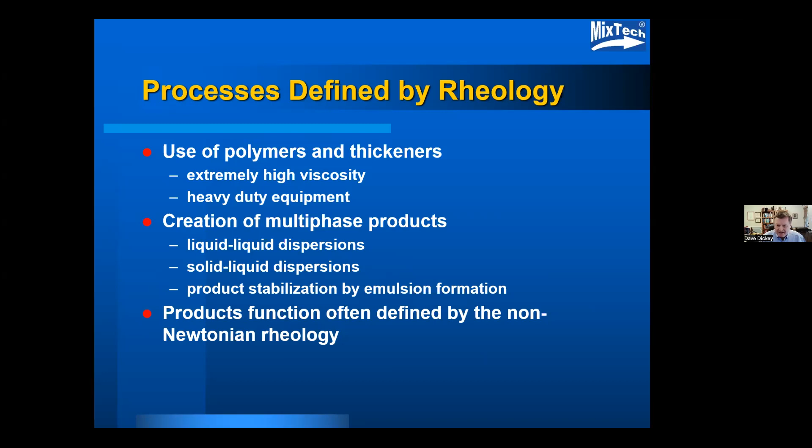So some examples: the polymer products, I'm going to take a look at one as a filled polymer. There are certainly other processes and products that involve blending of different polymers. Food products, things like sauces, bread doughs, candies. One neat feature of food products is everybody's kind of got an idea of what they are. The ingredients are non-toxic, the products are usually low value. The difficulty is that the value achieved as a result of processing is not greatly increased. Then personal care products, toothpaste, creams, lotions - I've got an example of that, which is much more general than what we've already discussed, but still something with some emphasis on how you go about doing the evaluation.

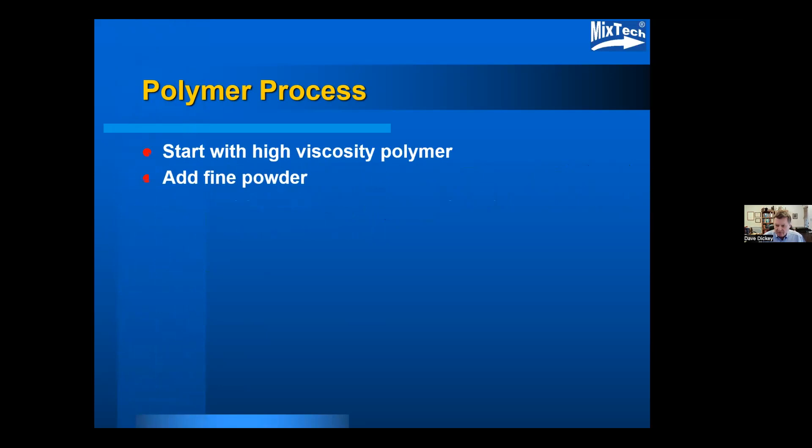The first is a high viscosity polymer process. They start with a high viscosity polymer and add a fine powder to it, which gives you a filled type of product. The ingredients are placed into a heavy duty planetary mixer. The lid is closed and a vacuum applied. This is mainly to reduce the amount of air being dragged in by the powder and to limit bubble formation.

The products, or ingredients, are mixed together basically until you get a well-distributed polymer result. Subsequent processing was done to form desired shapes and products, which I think happened to be what you'd classify as a medical device.

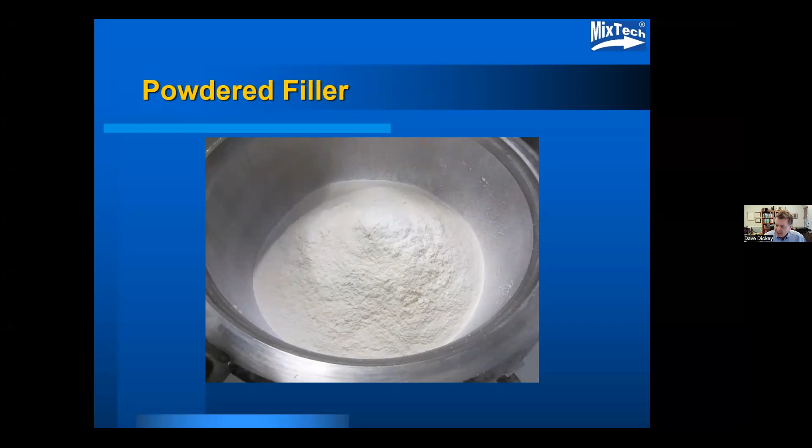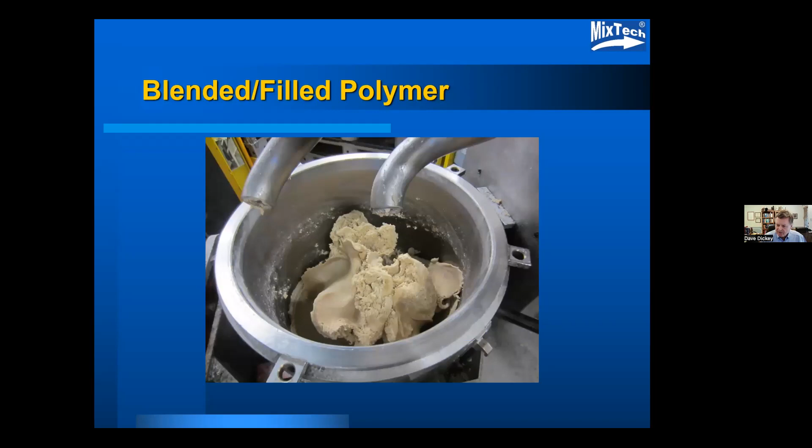I'm not sure how this applies to some of the things, but it's certainly not uncommon in terms of some of the things that are produced. Just recently I've been working on a process where they were using a lower viscosity material but going to about a 60 or 70% filler, which kind of messes with the rheology and the processing capabilities.

A little bit about industrial and commercial food preparation as examples of some unusual materials. Industrial food preparation is typical of large-scale processes, things like bottled products, frozen foods, and other food service items. Commercial food preparation is typically more restaurant quantities and things of that sort.

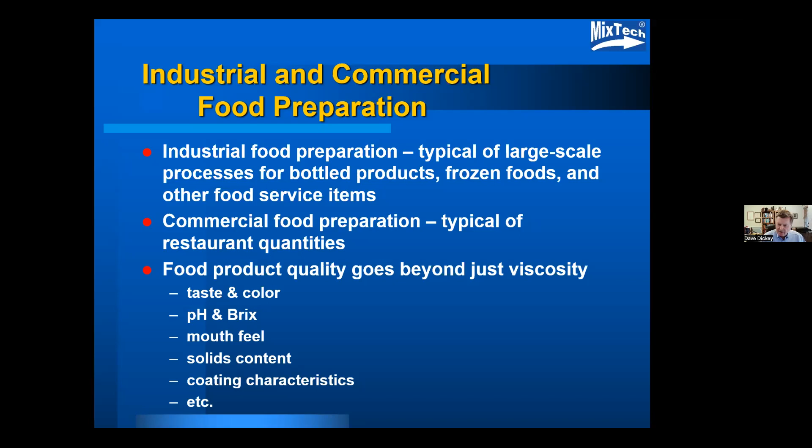The rheology gets fairly complicated here. It's a lot beyond viscosity because you're looking for taste and color, so there are uniformity characteristics. You have pH and Brix, which tell you something about resistance to degradation or shelf life. Mouthfeel is obviously a viscosity property, but I'm not quite sure how you define it. A lot of these materials have some solids content, and coating characteristics are quite common in terms of what you're trying to achieve.

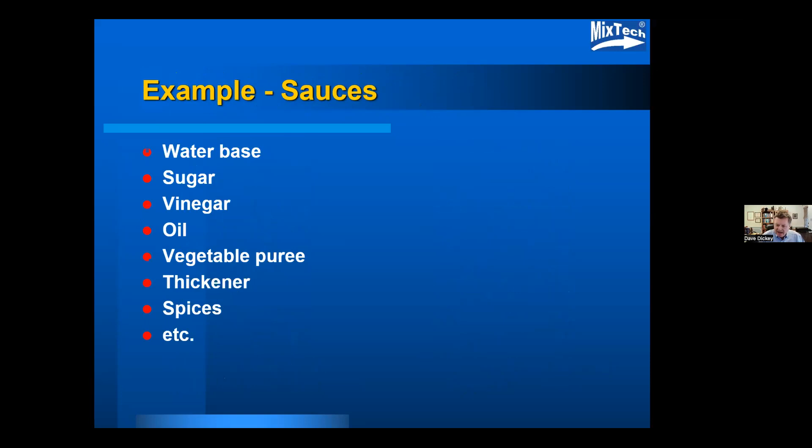A good example might be a sauce, like barbecue sauce. It starts with a water base, then they add sugar, vinegar, oil, vegetable puree — say a tomato paste or something like that. They may add some thickeners and certainly some spices.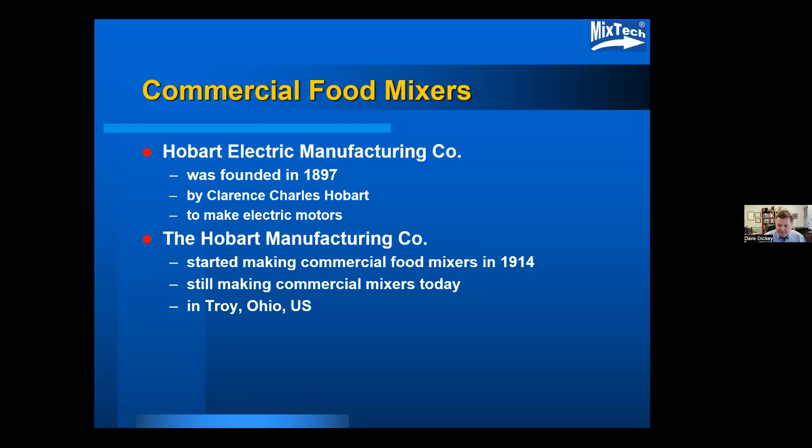An example of commercial food mixers is kind of interesting. Hobart, a name most people might recognize, began making electric motors back in 1897. Hobart Manufacturing Company started making commercial food mixers in 1914, and they're still making pretty much the same thing today in Troy, Ohio in the US.

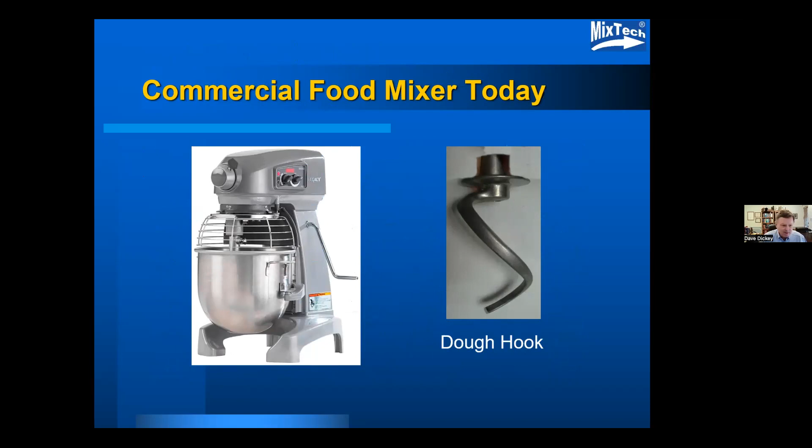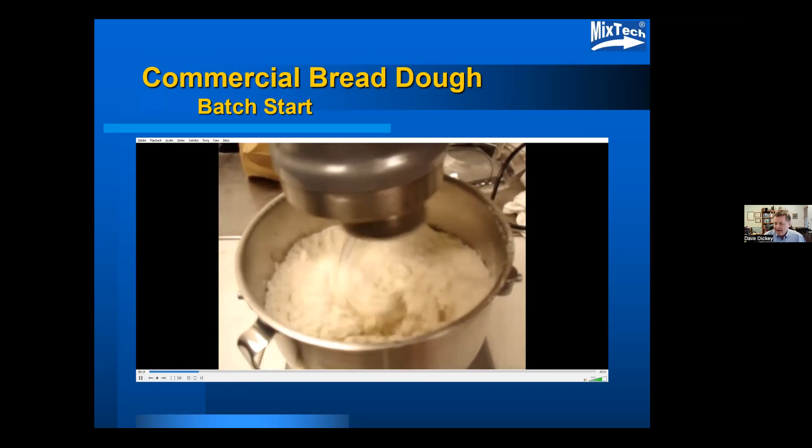Here we see one of the current commercial food mixers, a planetary mixer that comes in a variety of sizes. The device on the right is a dough hook, about as crude an impeller as you can get, but used for common problems like baking bread dough. This simply shows how it looks when you start with flour and water — it would probably normally include shortening and leavening, but here we were just looking at how the dough hook mixes the material and what ends up happening.

After about a minute or so, the material starts looking a little more dough-like, and you've made some drastic changes in both the viscosity and elasticity of the material, because you're developing gluten from the flour with the water. A couple minutes further on, you're basically dealing with a ball of dough, and at this point you're trying to knead it and develop the gluten.

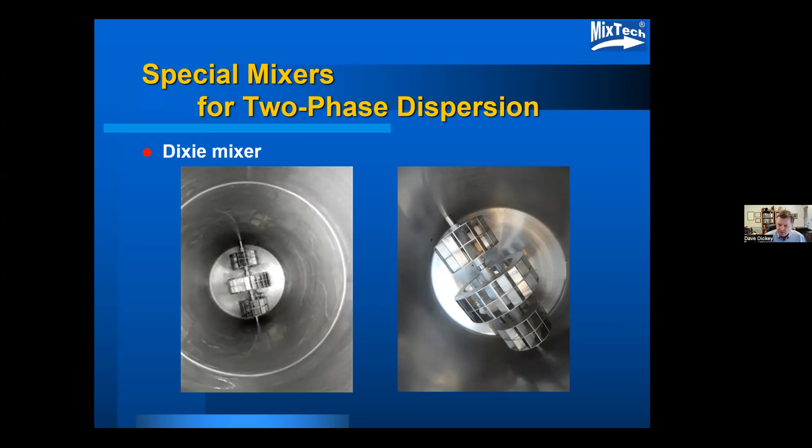I did throw this one in to give a feel for an intermediate to low viscosity application, commonly called a Dixie mixer. It has a series of paddle wheels that rotate in the bottom or near the bottom of the vessel, and this is designed to disperse liquids for making things like salad dressing - so you're probably dispersing an oil into an aqueous material.

And then some examples of personal care products. We've had a couple of comments about these and got into a little more detail of the formulation. What you ended up with, in this particular case, is a very simplified form of one of the processes that we had to look at.

I broke it down into 3 steps, which is actually the way we broke down the process itself, because each of the steps involved different viscosities and some differences in the processing conditions. I think we even changed the rotational speed of the mixer at points in the process. The first step was just mixing water and some kind of copolymer for about 10 minutes at ambient temperatures.

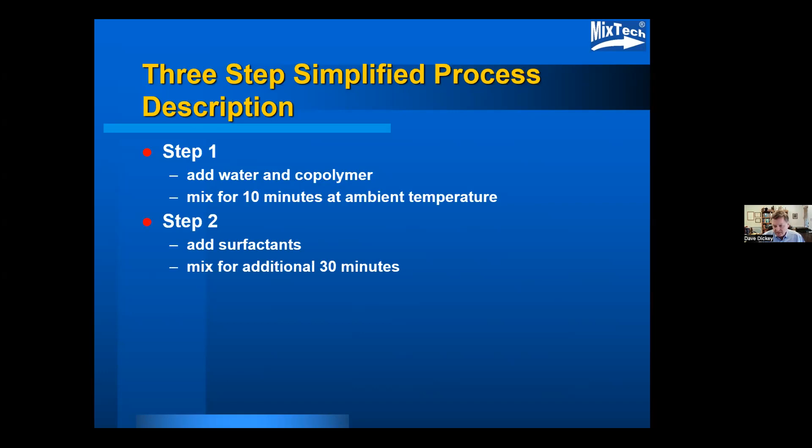The second step involved the addition of surfactants and other ingredients, mixing for an additional 30 minutes to get to uniformity. The final step was, a little bit like what was addressed earlier, adding sodium chloride, which was then heated to 35 degrees C to make sure you got the salt dissolved and distributed, with an additional 20 minutes of mixing. The actual process involved the addition of more than 20 different ingredients, including colorants, fragrances, and a variety of other materials, things like perhaps a sunscreen or something of that sort.

What you get out of that is, again, much of this is a matter of: here's the thing we want to produce, here's the equipment we have available to produce it. And what you hope for is that you either have some very robust equipment or something that will do pretty nearly anything. One example is this double mixer on the left, which has a high-speed shaft with a couple of sawtooth blades on it, and a sweep impeller that provides some turnover and mixing of higher viscosity material.

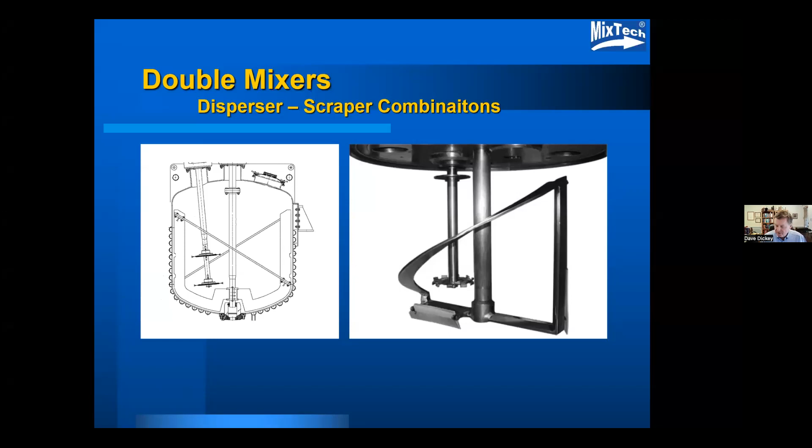This is the type of thing that might be used in creating some kind of dispersion and an end product that's an emulsion. The one on the right is a similar type mixer, except the type that might be inserted into a can for mixing and pulled vertically out of the can.

Not probably the best. And then back a little bit to the one that was shown in the Chemical Engineer's Handbook from 1934 - this has a sweep impeller with scrapers on it and some blades inside the anchor part of it, with a counter-rotating turbine blade in the center, which allows lots of different things to be done.

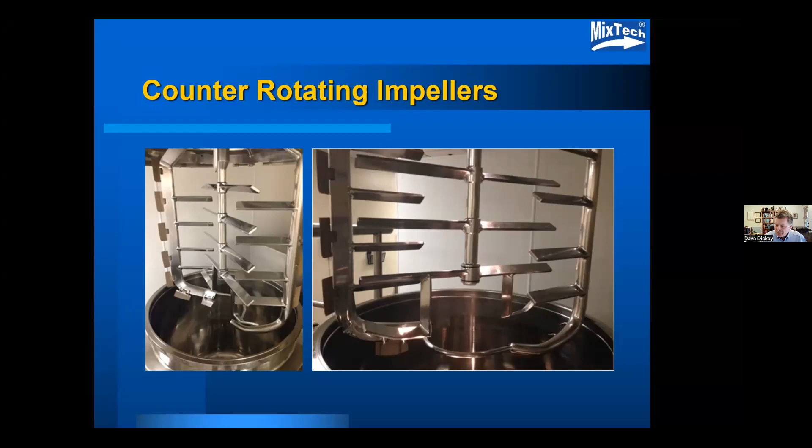I've seen these used in some of the personal care products, as well as other kinds of medium to fairly viscous materials. The last one I put in here is kind of interesting, one I've seen in an earlier presentation of what I consider to be container mixers. These are mixers that have no internals.

They simply rotate or wiggle the container well enough to cause the mixing to take place. I put this in here because I encountered a particular process with development work done in one of these types of mixers. I honestly couldn't figure out how to do it with an impeller because the product stuck to the impeller better than anything else in the process.

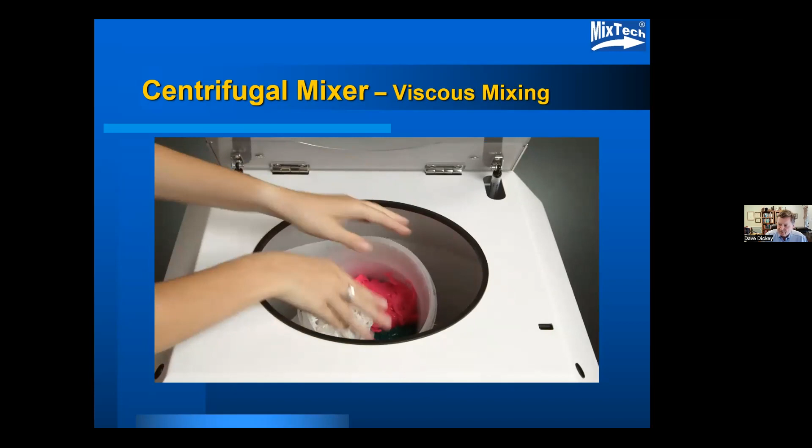But here's the case of the centrifugal mixer with a rotating container that gets you the circulation pattern that, over not too long a period of time, will blend some fairly viscous materials with absolutely no internal blades or mixing device. This just shows a case where they take viscous materials in different colors and look at how the material is blended and mixed.

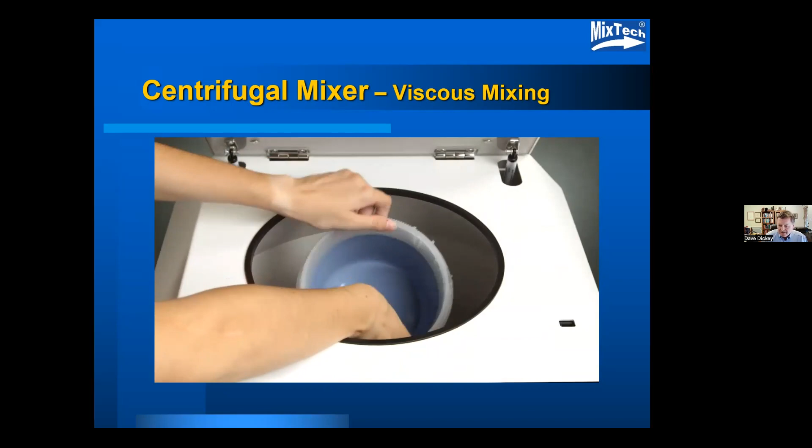This type of equipment is extremely effective for laboratory mixing, a little more difficult to duplicate in commercial sized processes, although there is some mixing equipment that gets up into a size where you can work at larger scales. In most cases, some degree of experimentation and empirical adjustment is necessary to make them work the way they're supposed to.

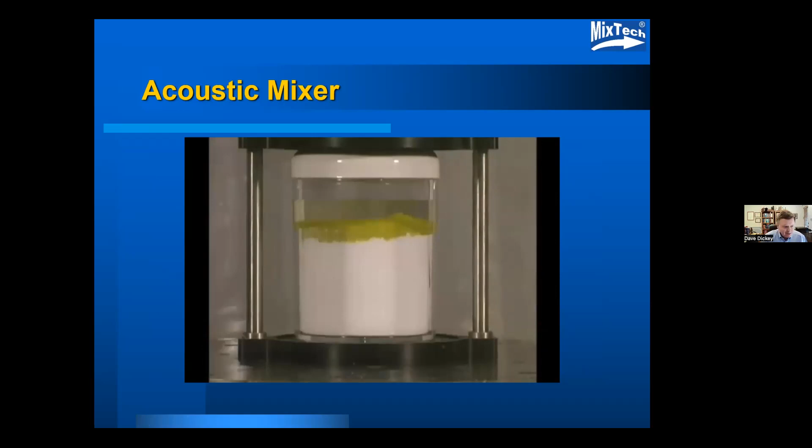The last one is resonant acoustic type mixing, which demonstrates that it's capable of mixing some. This is just a laboratory container held in place, but it shows corn syrup, powdered sugar, and sand, probably some of the most dissimilar materials. Yet in a 30-second mixing time, admittedly a small container, they were successful in getting the material not only to turn over, but actually mix together rather well.

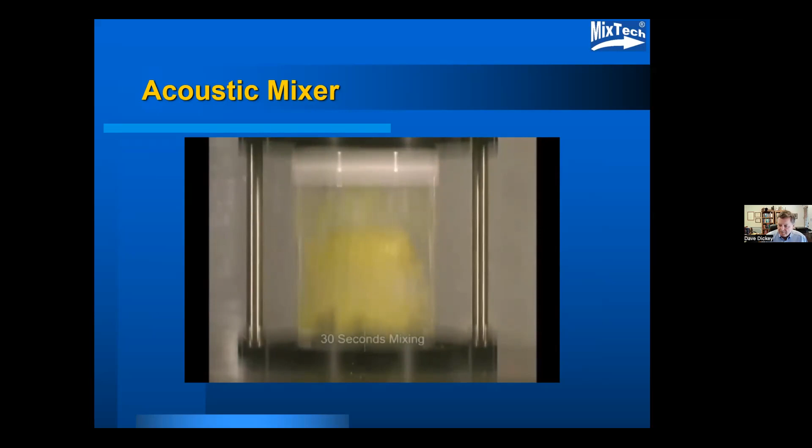I think the particular people I've seen use this are delighted with the fact that it's relatively easy to clean or throw out the beaker when you're done mixing, almost regardless of how difficult it is. This shows here, in a minute, a little different angle to get a sense of how the material is being moved as a result of the acoustic vibration.

So out of that, the conclusion I tend to draw is that lots of different types of both conventional and unconventional mixing equipment get used for some of these high viscosity industrial mixing applications. There's a wide diversity of products. I've often joked that I didn't know some of these products existed, or that you'd even be able to sell some of this stuff. The viscosity is often a result of either multi-phase or polymer thickened fluids, and is definitely being driven into the non-Newtonian area for the product characteristics.

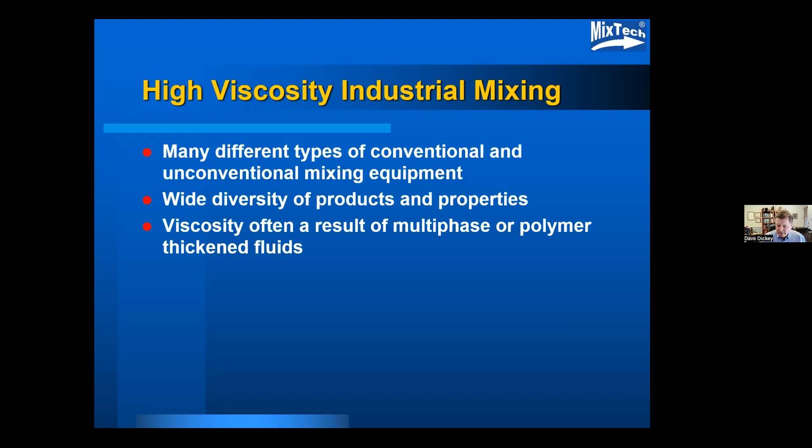That's basically what I wanted to present. The problems are very difficult to resolve into 'you start with this and get to that.' Much more of it is you start with existing equipment and an existing process, and figure out how to put the two together.

Open for questions. I didn't notice whether there were any or not.